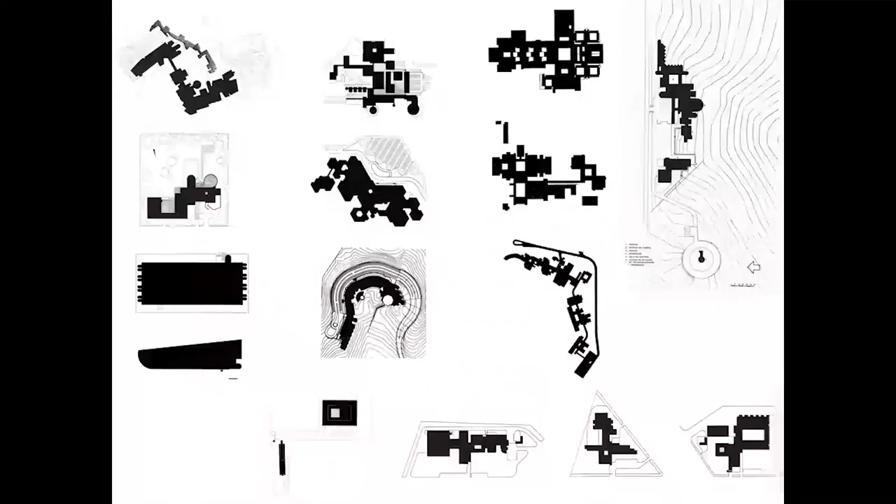Julio Cano Lasso is an architect that was born in 1920 and belongs to the second generation of Spanish modernity. It's a generation that was modern, based on the international style, but also recovered a lot of the traditional knowledge of Spanish architecture. He's an architect with a huge body of work, and is very eclectic. He's able to work with different forms and different programs in a very special way. He has a very special methodology of work based on the exploitation or utilization of tradition, of different traditions, depending on where he's operating with the architecture.

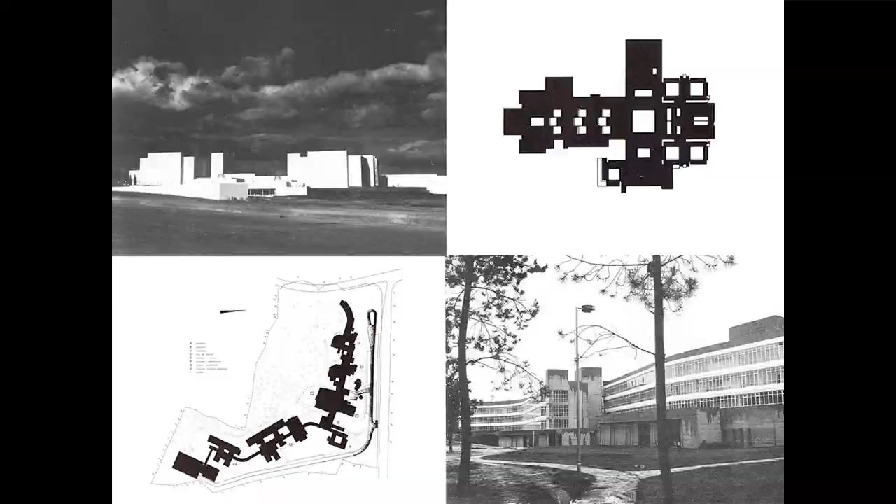For example, these are two good examples of how he used to operate with architecture. These two buildings are the same building: a labor university, a university for plumbers, woodworkers. It's not a higher education university, it's for artisans. They have exactly the same program, exactly the same area, but they are situated in two different areas of Spain, one in the north and one in the south. You can see the difference he's able to make, how he's able to integrate the traditions of architecture depending on the site he's operating.

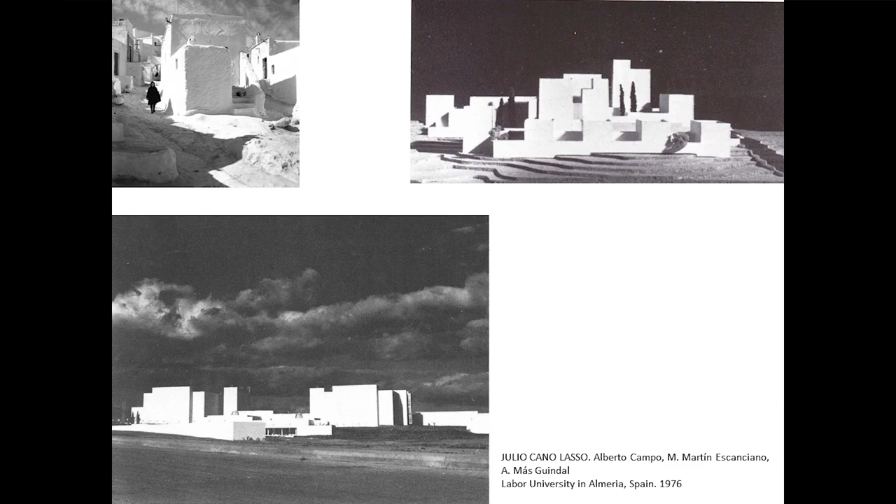For example, this is the Labor University of Almeria in the south of Spain, and he's using this kind of whitewashed volumes under the sun, with a lot of shades, protecting from the sun.

And this is the same university, but in the north of Spain, the Celtic part of Spain. So he's using another set of tools, another set of architectural elements. The response, the answer to the same question, is completely different depending on where he's working. And this is how he uses tradition, in a very free but very thoughtful kind of way.

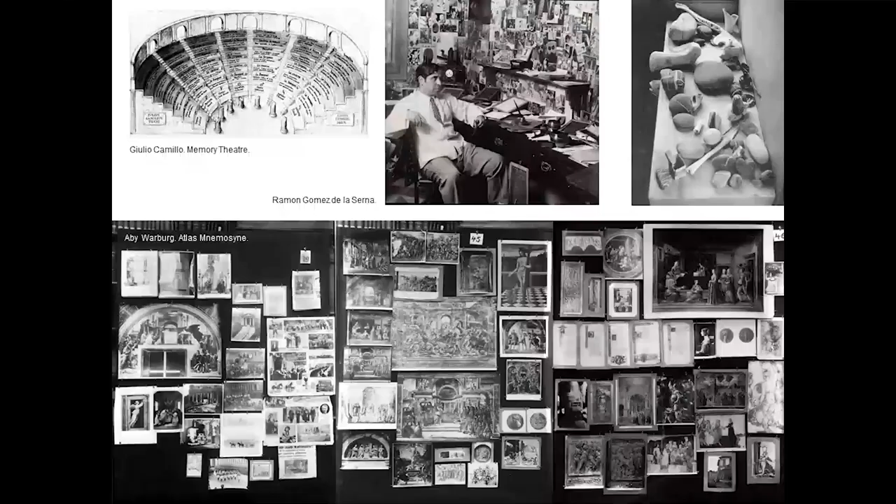And he's not the only one using this kind of tradition, constructing this kind of constellation of forms for each project. There are other examples, like Ramón Gómez de la Serna, the Spanish writer, or Giulio Camillo, or Aby Warburg in the field of history of art. Julio Cano Lasso was always making this kind of constellation, or archipelago of references, for projects that were mostly between the modern moment in Europe, classical European architecture, and some more personal references to his own work as an artist and as an architect.

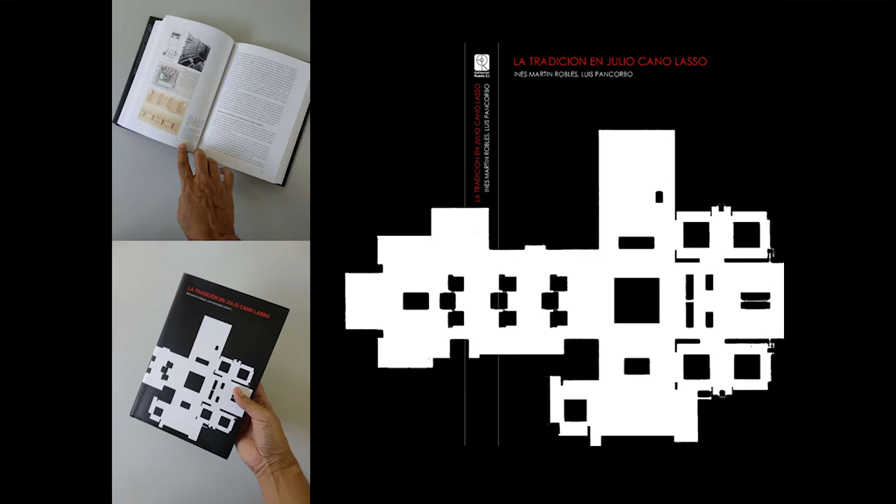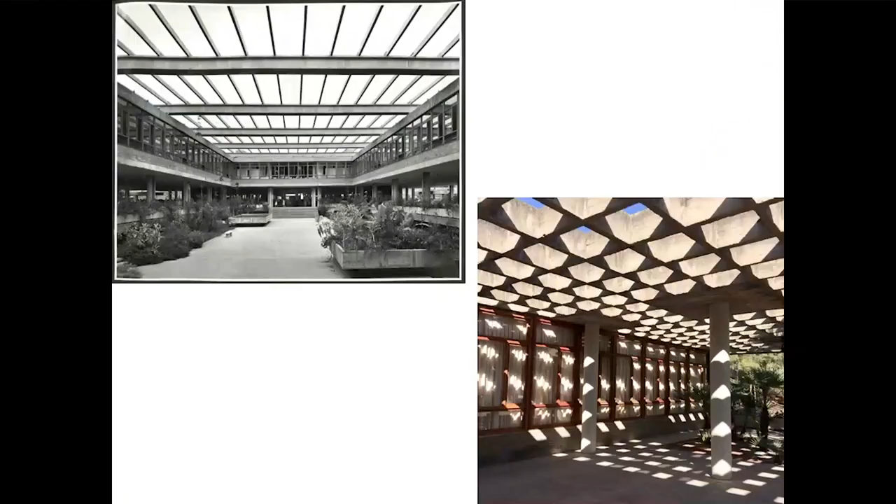So we have been studying this for many years. We published this book about his work and his methodology. And it's important to situate him also into the Spanish tradition, he belongs to this second generation. He was working with Fernando Moreno Barbera, one of the first modern architects in Spain, who was also specialized in universities, with a lot of care for the material.

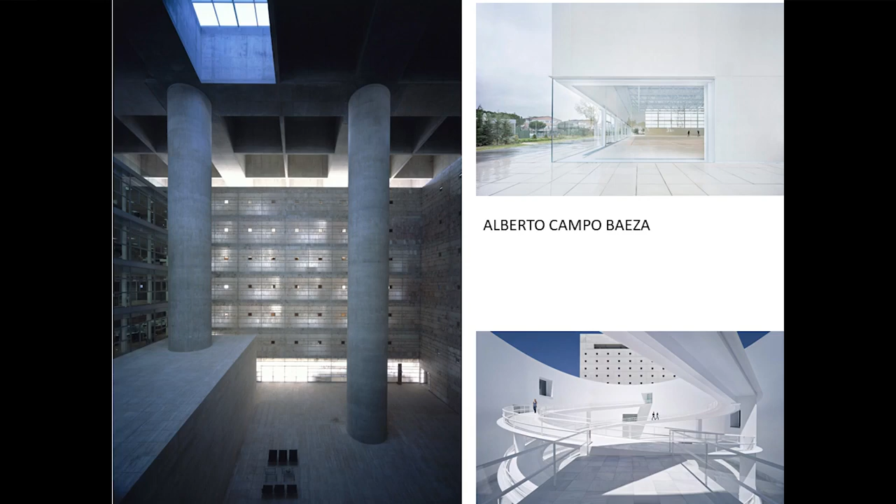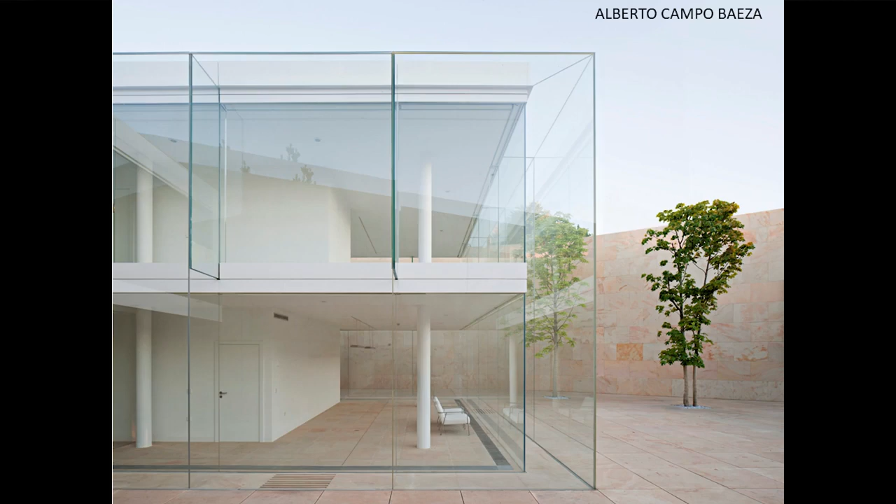This is a characteristic that is also present in Julio Cano Lasso: a lot of care about the material depending on the site, and a lot of care about the methodology and the insertion of tradition into the work. So what are the architects that have used this methodology? Who are the heirs of Julio Cano in the history of architecture in Spain? For example, Alberto Campo Baeza, an architect still working today, shows the same care in materiality and the same insertion of tradition into modern architecture.

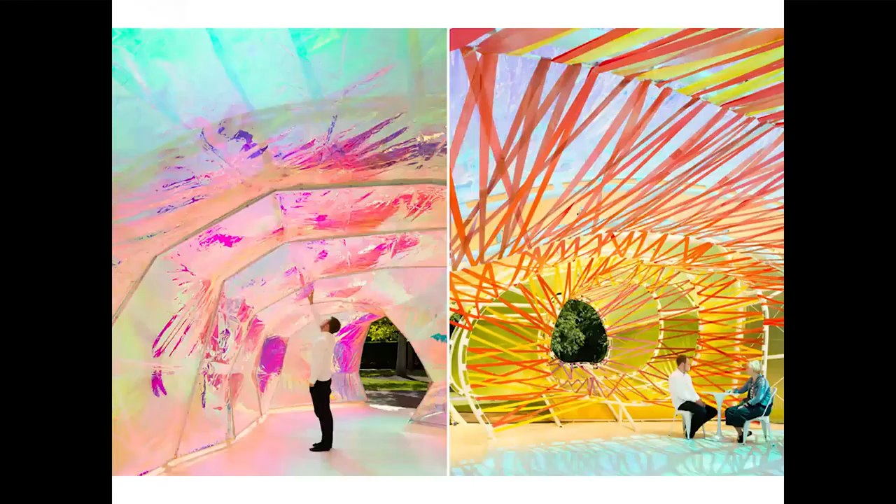For example, Ignacio Mendaro, this is a work in Mexico. Selgas Cano is a very prominent practice today with a completely different style, but they are closely related to Julio Cano because Lucia Cano is his daughter and Jose Selgas is his son-in-law, so they are family. You can see the same materiality and the same experimentation with the technical condition of architecture and materials.

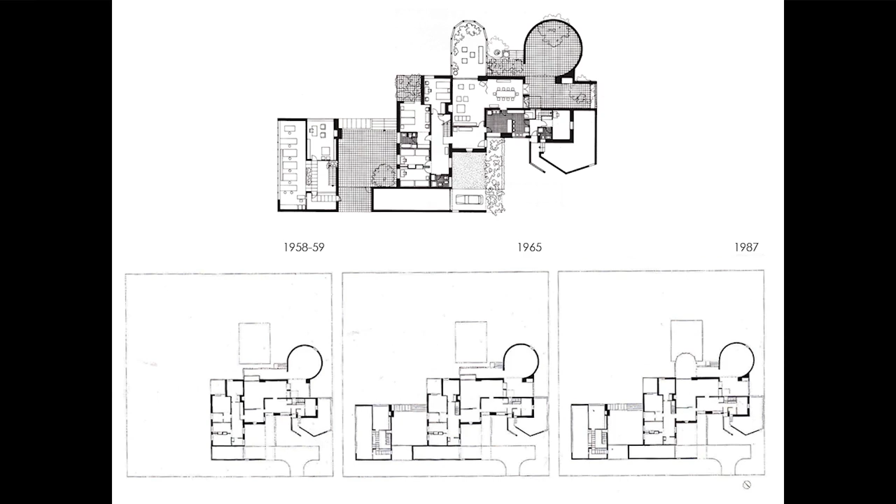So these are pictures. And of course, Studio Cano Lasso, where Ines and I were working for 9 years. This is actually the office of Julio Cano Lasso, and we were working exactly in this part, I think I can draw it. We sat exactly there for 9 years, making lines. It's a very traditional kind of architecture, but also a very modern kind of architecture.

While working there, we had growing responsibilities over the 9 years, and we ended up being the directors of many of the works of the office. For example, this is a very good example of the work we did there.

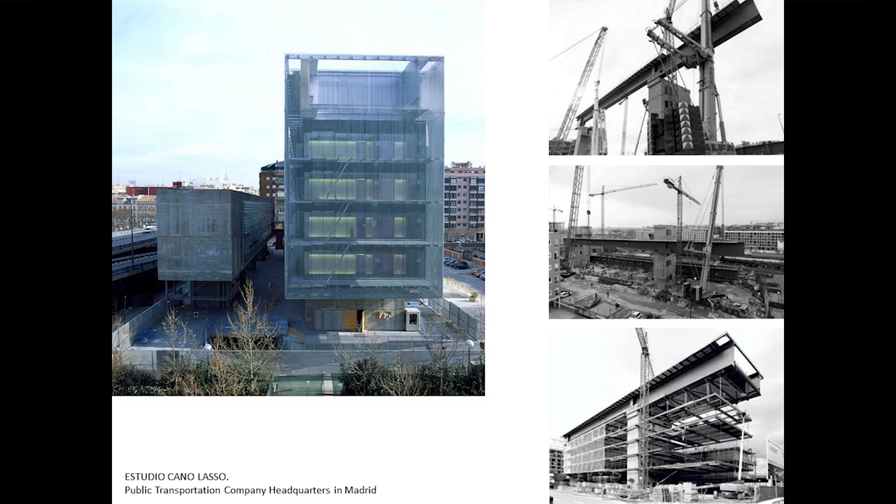This is an office in Madrid for the public transportation company of Madrid. You can see it's a very technological object with a lot of care in the material and in the performativity of the facade materials. The building is actually hanging from these beams, like a big beam with a lot of hangers, and the building hangs from there. So there's a lot of effort in the technological development of the building, but it's also very rooted in the European tradition of the modern movement.

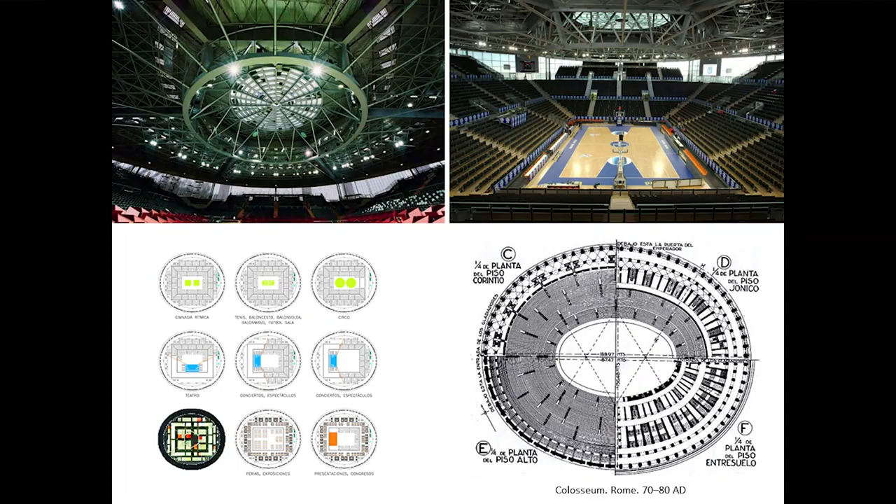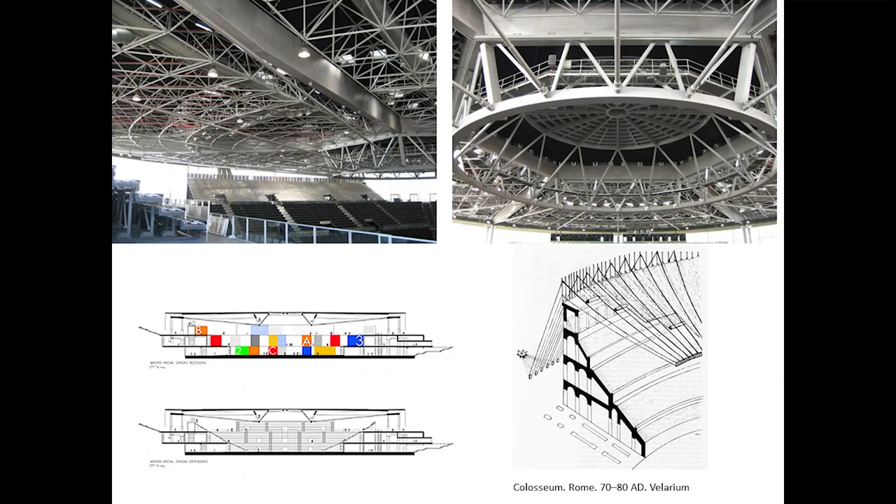This is another work we did for Studio Cano Lasso, this multi-purpose pavilion. Again, it's a highly technological building, but also highly traditional. If you see the plan of this building, I remember tracing it on top of the plan of the Coliseum. The form is exactly the same, because the visibility of the Coliseum is perfect, and we wanted this for this building. Even the structure, a tension structure hanging from the sides with a compression ring and a tension ring, is based on the velarium of the Coliseum. So it's a very traditional interpretation, a reenactment of a traditional architecture that we found.

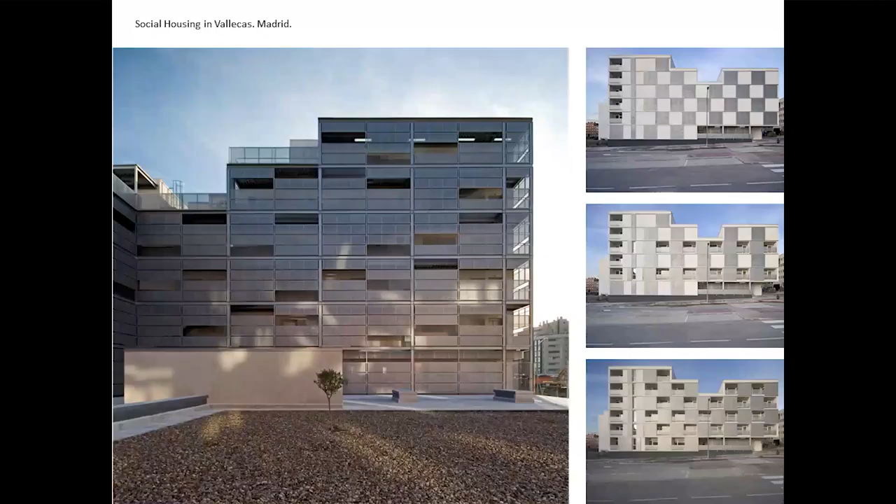And of course, at one moment we started our own practice, and we started doing what we knew, the same kind of things: a very technological and industrial kind of architecture. This is a social housing project in Madrid as well, but also using traditional devices to root our architecture, to relate it to the traditions of Madrid architecture or Spanish architecture in general. For example, you can see these houses.

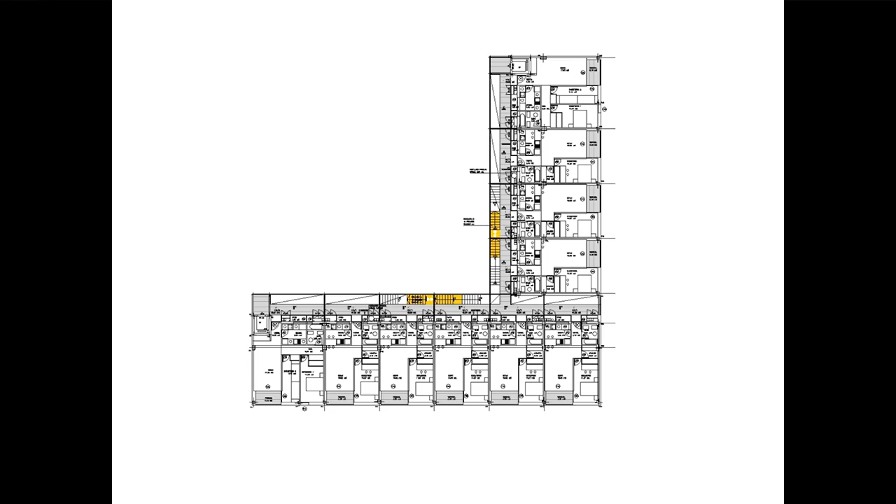These houses have only one window, that is not actually a window, but a vertical patio, where the shutters can slide into the building. This is very related to the tradition of Mediterranean patios in vernacular Spanish architecture, but changed from a horizontal position to a vertical position. We explored this in many of the competitions of our office.

This is another project that's a good example of this twofold condition between tradition and technological development of the building: these temporary shelters in Parla, very close to Madrid as well.

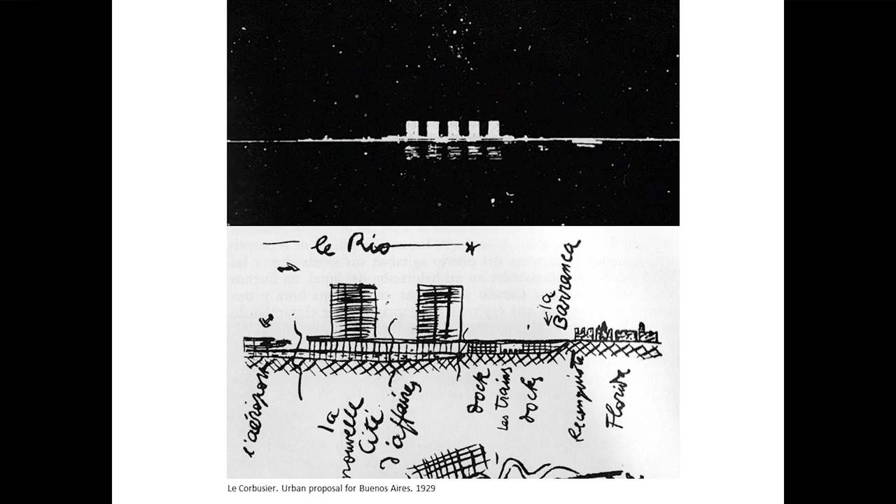That is a building that is inspired by, or was always in the back of our mind - this drawing by Le Corbusier for Buenos Aires, which you can see is very similar to the final thing we did in Parla.

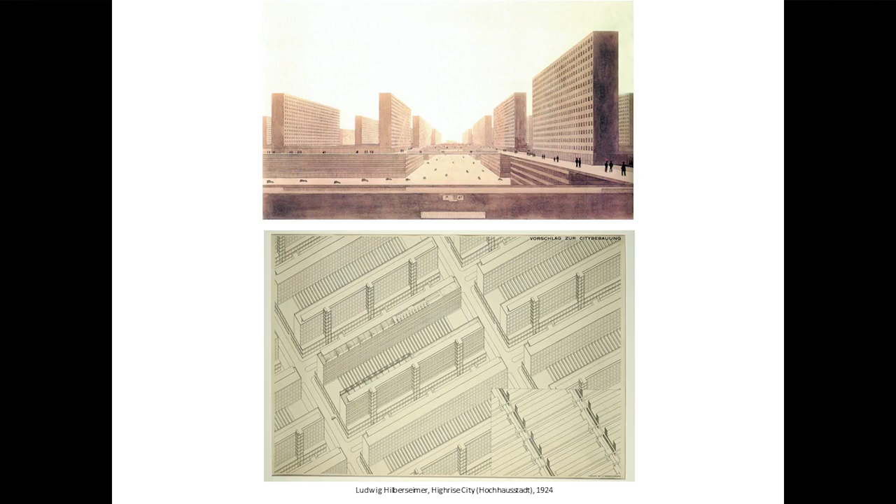We started exploring other references like Ludwig Hilberseimer, embedded in this kind of architecture. We explored using vegetation or green spaces to enclose the public spaces of the building. This building has housing or temporary shelters on top, but public uses in the bottom, in the plinth. We created some gardens to enclose this space - this was the first time we started using this kind of vegetal architecture.

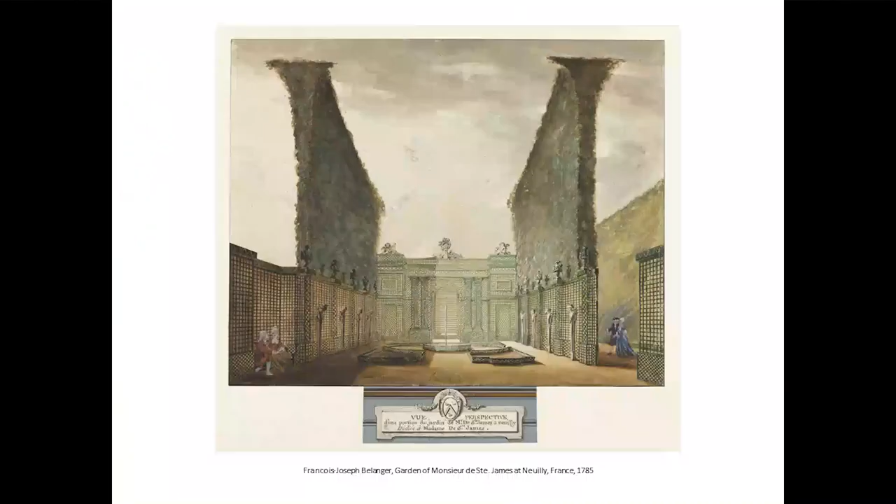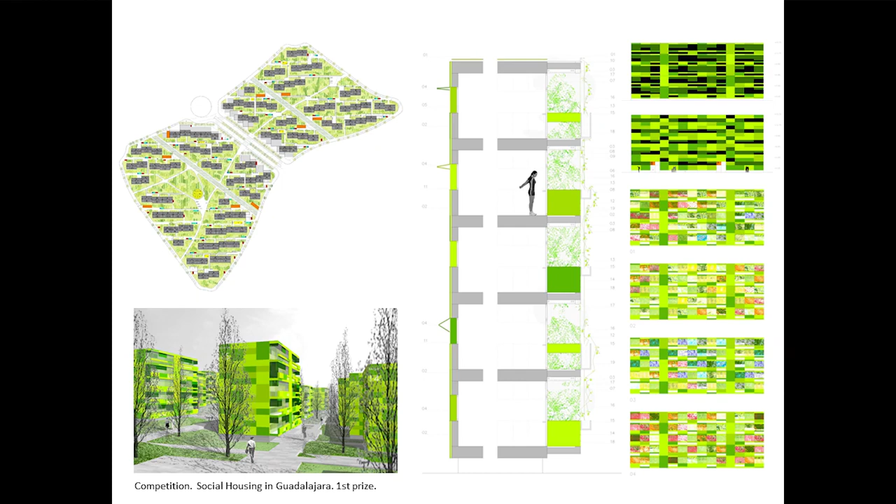You see in the diagrams on the right that there are a lot of spaces enclosed, defined by this kind of vegetal building. More literally in these buildings in Guadalajara - this won first prize - there were vertical gardens facing south all the time to protect the houses from the sun, and also to create continuity between the horizontal and vertical planes of the public space.

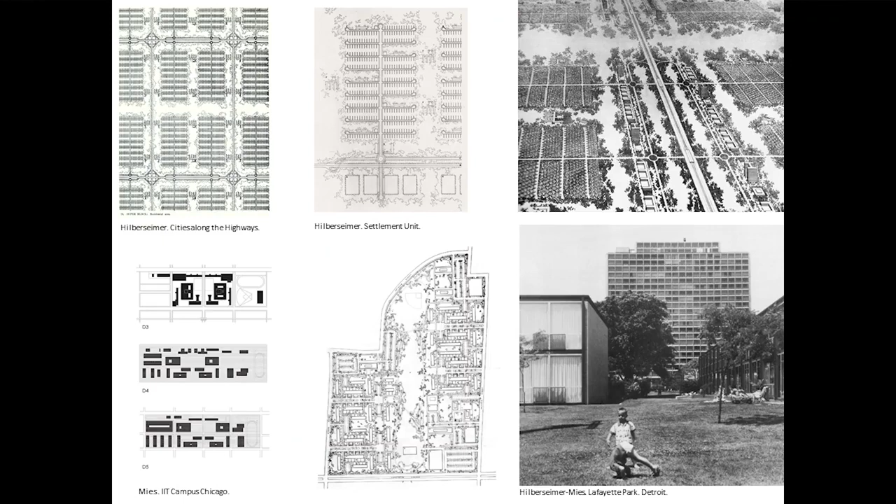Of course, there are a lot of references again to Hilberseimer, to Mies van der Rohe, to the IIT campus in Chicago - that is the only settlement unit by Hilberseimer that was able to be built, even partially.

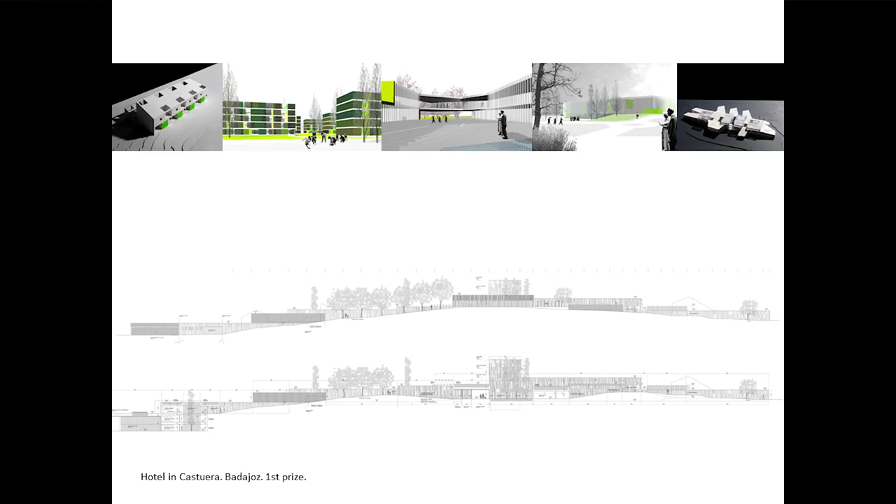Our office is based on, our clients - we never had a private client until now, until COVID, we'll talk about that later - but we do competitions, architectural competitions. We have done more than 100 competitions, and we won several of them. So this is the specialization of the things we do in the studio.

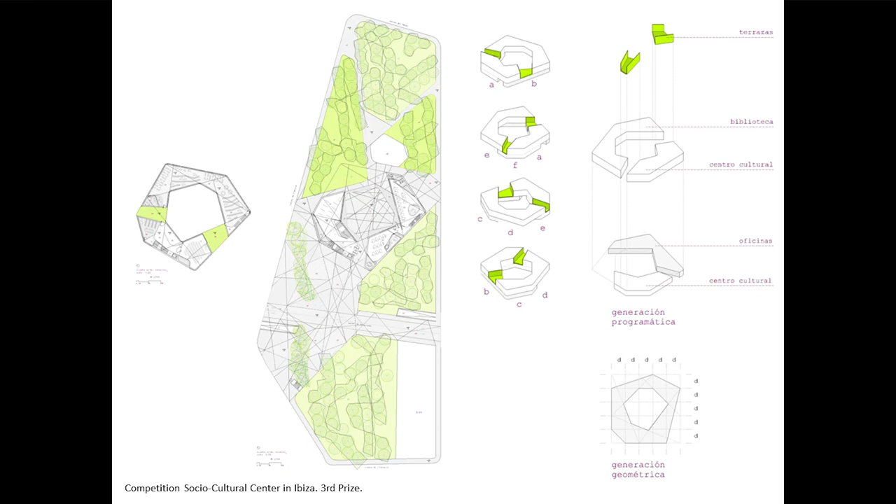For this building - this project, the Villanueva de la Serena Congress Center - it belongs to a family of projects where we were trying to wrap around a public space with a continuous building. Other members of this family are two projects: the competition for the Socio-Cultural Center in Ibiza, and this other cultural center in Valladolid.

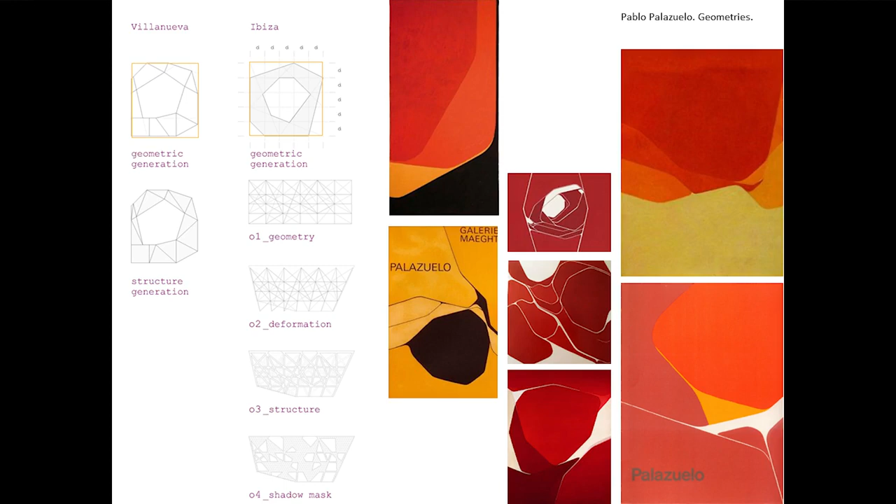In this family of projects, we were trying to achieve complexity in the spaces through the use of a basic geometry coming from divisions of the square. As a reference for these geometries, we used the body of work of the Spanish painter, also trained as an architect, Pablo Palazuelo.

In the model, usually when you're thinking of a fluid space, this is the kind of work related to fluid spaces where parametric software is needed, and this raises the budget of construction a lot. For example, in the Disney Concert Hall in Los Angeles, the budget was $130 million for double the area we have in our Congress Center, but our budget was only $10 million - a huge gap.

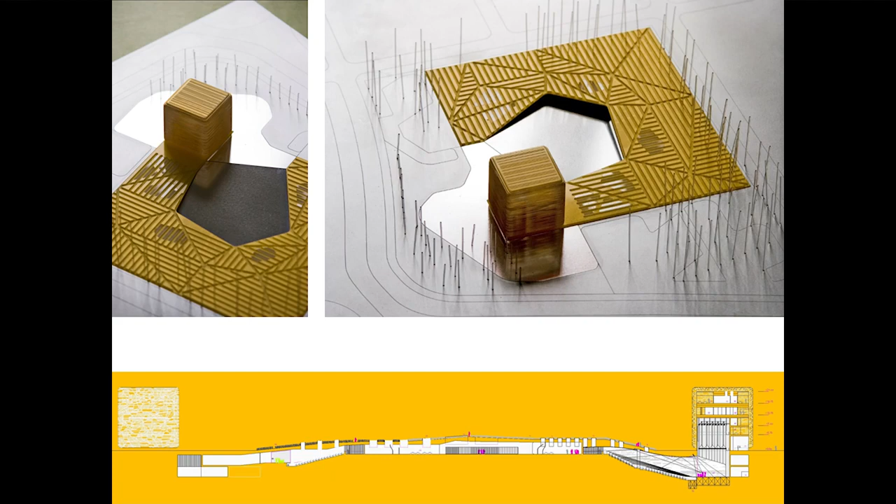The site of the building is situated on the boundary of the town, between the town center and the crop fields surrounding the city. So we wanted our building to be a transition between these two worlds, and therefore we wanted our project to be like a landscape, not a building. To achieve that, we made the roof the main facade of our building, as a new landscape, but we also created this part that is a public square accessible for everybody.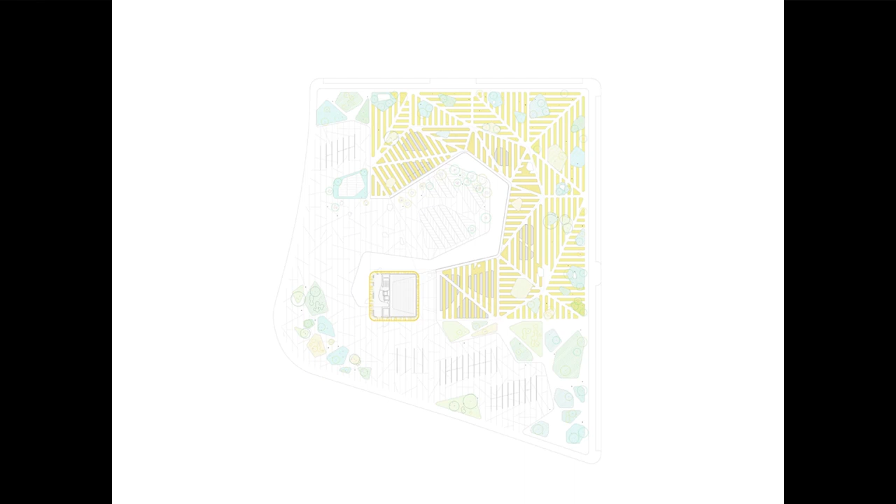And also a public part on the other side that is created with the crop fields. As you can see in this aerial view, it is some kind of intermediate space where these two worlds meet.

We wanted to have a public park that was not the typical park, but that was related with the agricultural landscape. So we use local weeds and local crops for the plants in the roof.

The surrounding fields, in some moments of the year, look like some kind of fabric. So we take advantage of this situation for the design of our roof.

As we wanted to have a landscape and not a building, we use landscape references. So for example, we use in this case the reference of the ha-ha.

That is this kind of fence, this English landscape device that they use to keep the cattle out of the houses without being visible, without seeing a wall. So it is some kind of invisible fence that you can see here and here.

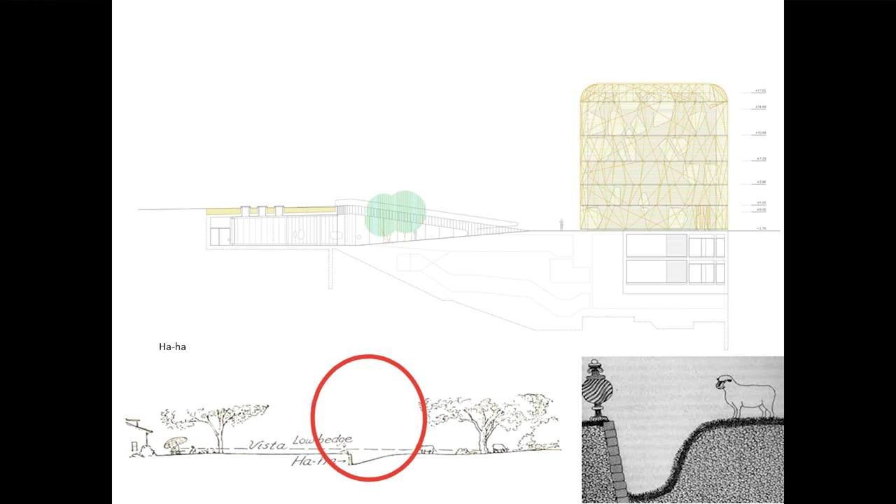And that you actually can see in the development of our project in the same way, so you can slide down into the building or slide up on the top of the park.

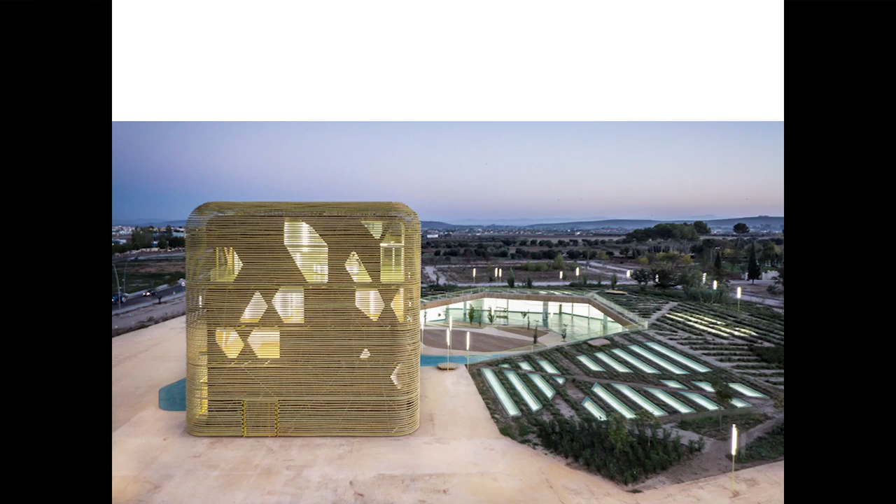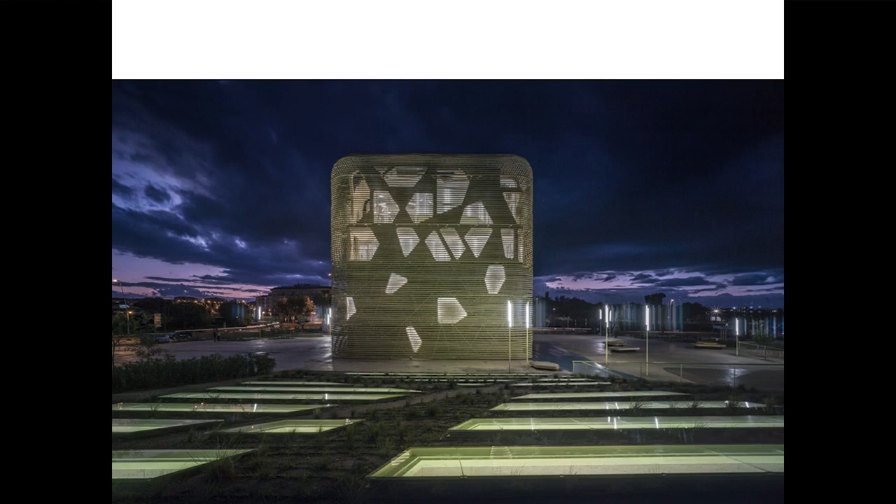And this is the space that it creates. So you can see the crop fields surrounding the building on one side, and in the other picture, you can see the background of the more urban part of the project.

So we wanted to make a landscape, as I said, but we found two big problems. One was the program. It's a building that should be divided into two big parts.

So there is part of the program, all those parts that are written in black, and this other part of the program, the one in green, that needs a different schedule and also a different entrance.

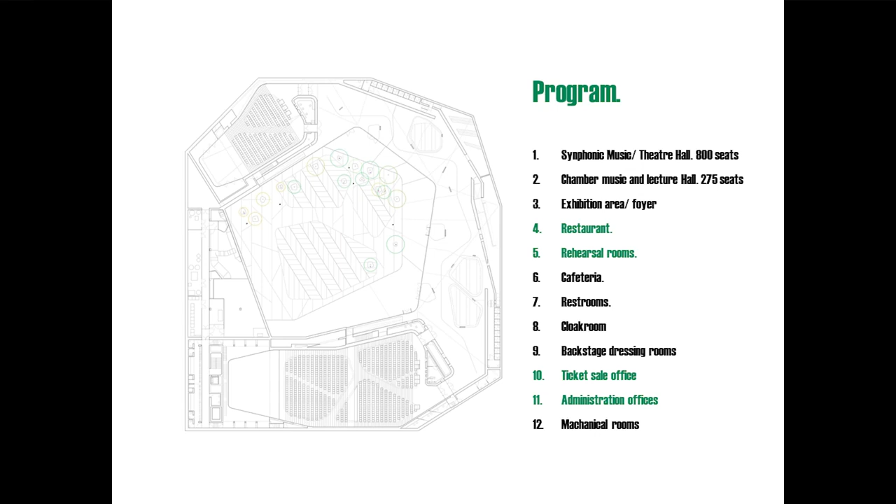And this is for a very functional reason. It's just that you need a box stage, a case stage, that in our case was a 6-floor stage building that we need to put inside our own building.

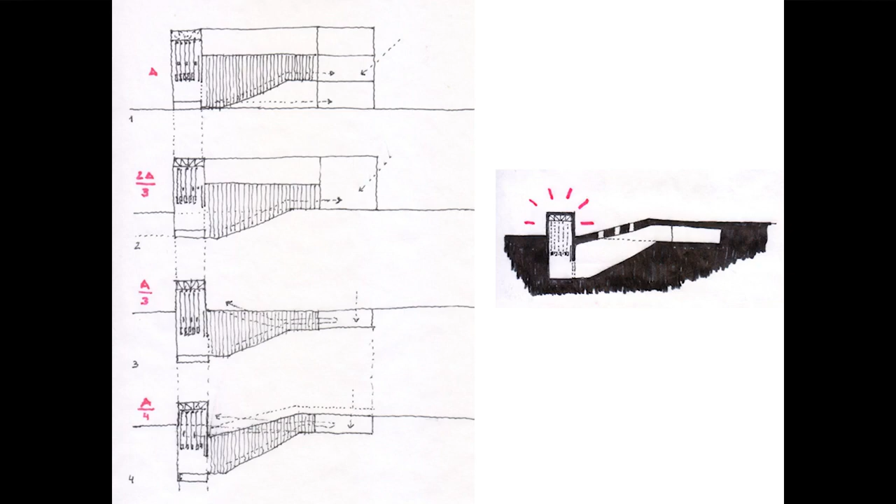So in this set of diagrams, you can see how we try to push our building into the ground in different iterations, until we reached the point where it was impossible for us to completely hide the stage box.

So we decided to take advantage of this situation, and this duality of the program gives us the opportunity to place all these things in the secondary kind of program on top of the stage.

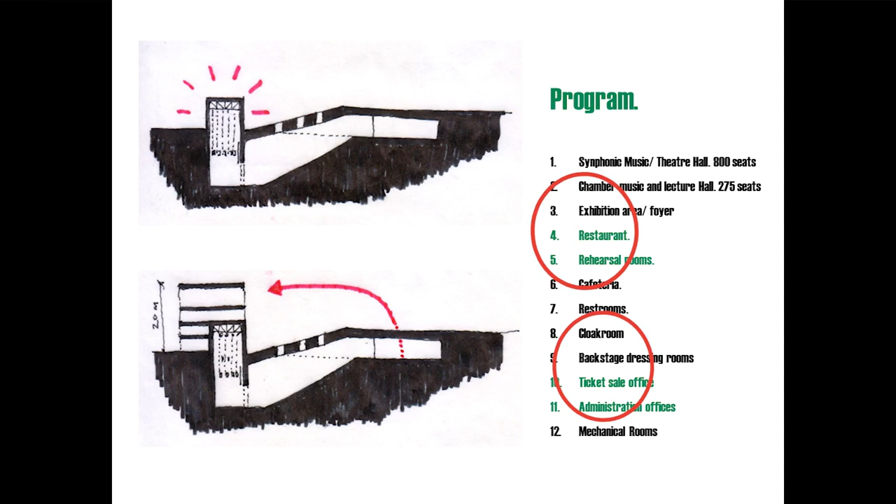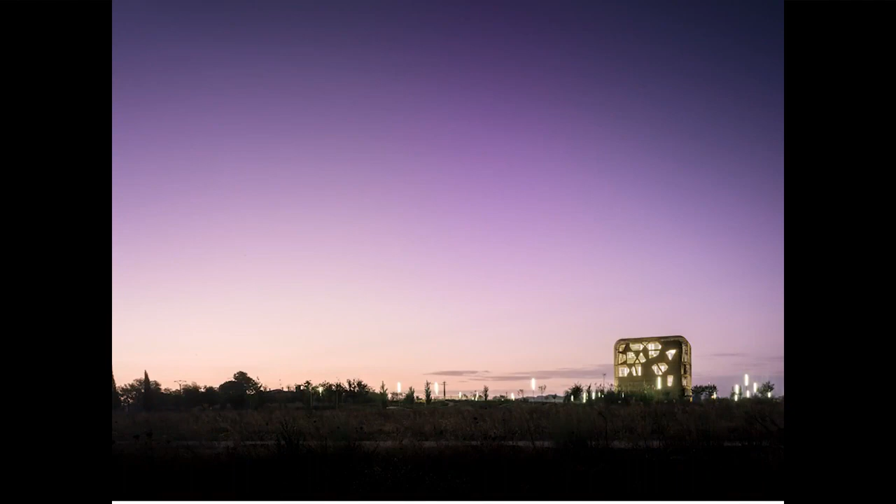So providing then a different entry and a schedule, and creating this box with the intention of also being a landmark into the landscape, so that it marks a very continuous landscape and marks the institution that is hosted inside.

We tried to create something similar to what the church steeples, the stork nest, or the bales of hay are doing in the landscape around our building.

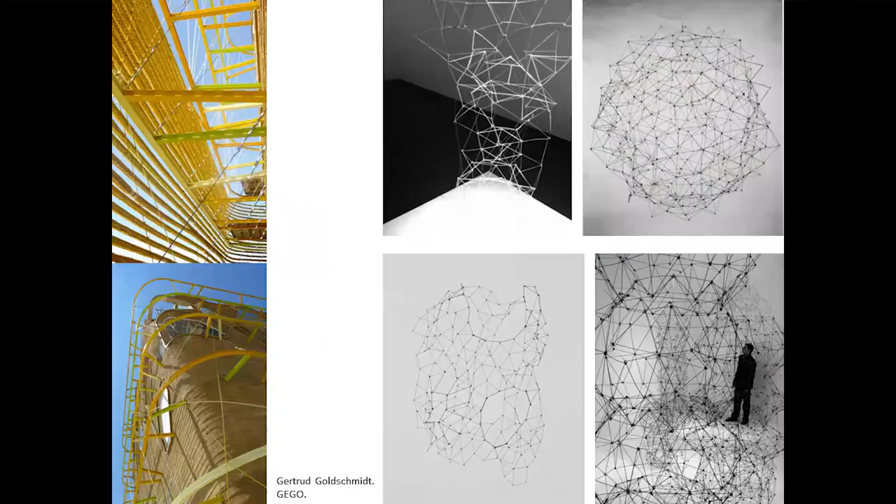We use for the structure of this box this more artistic reference, the work of the German-Venezuelan sculptor Gego, that has this kind of hanging structures.

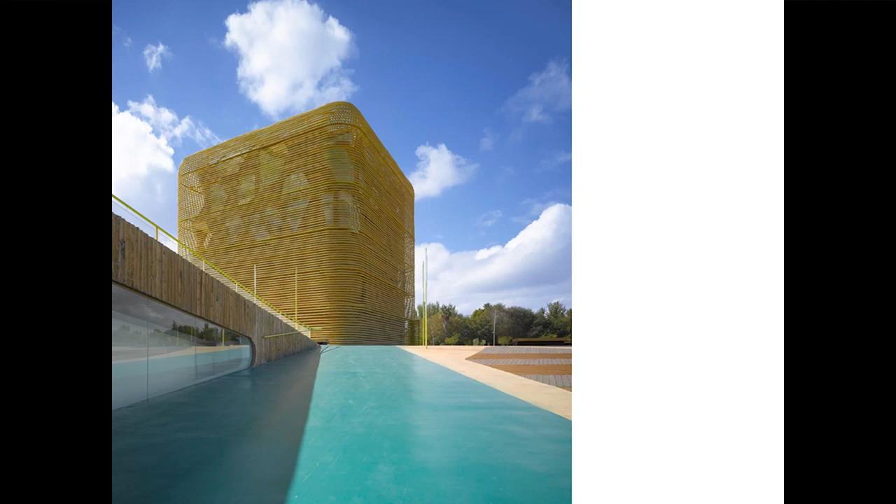So we actually made this skin out of ropes, hanging everything with this tangle of tension members, cables, and wires, putting this kind of rope skin outside the building as a shade device.

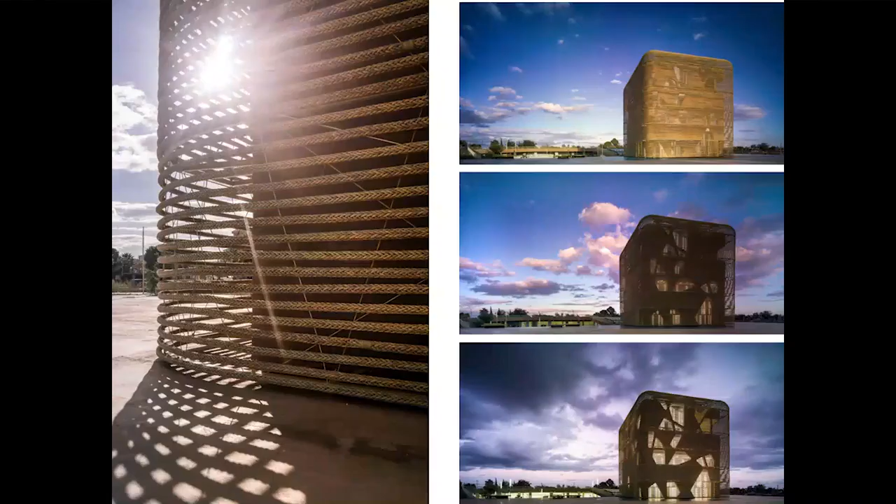It is a very performative skin because you can have a very different transparency of the skin depending on the light conditions happening inside or outside the building.

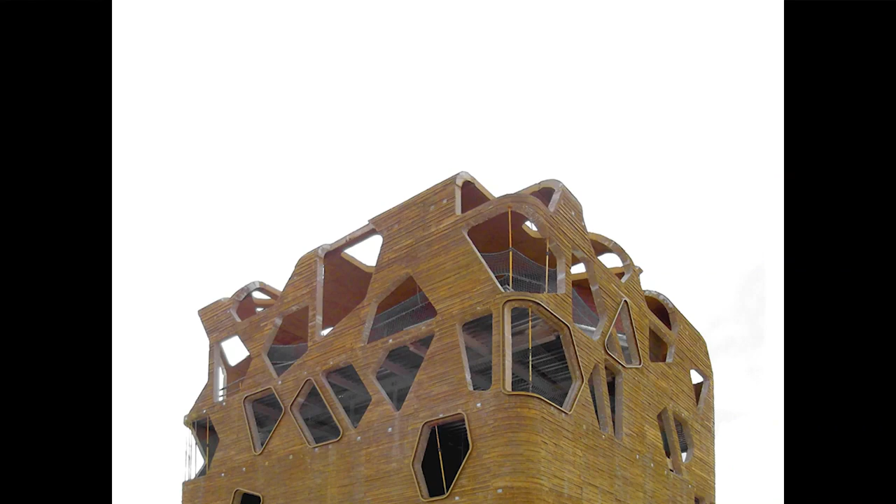As we needed to have a structure inside under this skin, we decided to have something more continuous, like a shell, made out of concrete, that is like a shell with perforations that have also the same geometry as the rest of the building around.

This part of the building is more related to the burrows of animals, the hives of wasps, or other kinds of animal architecture related with rough conditions.

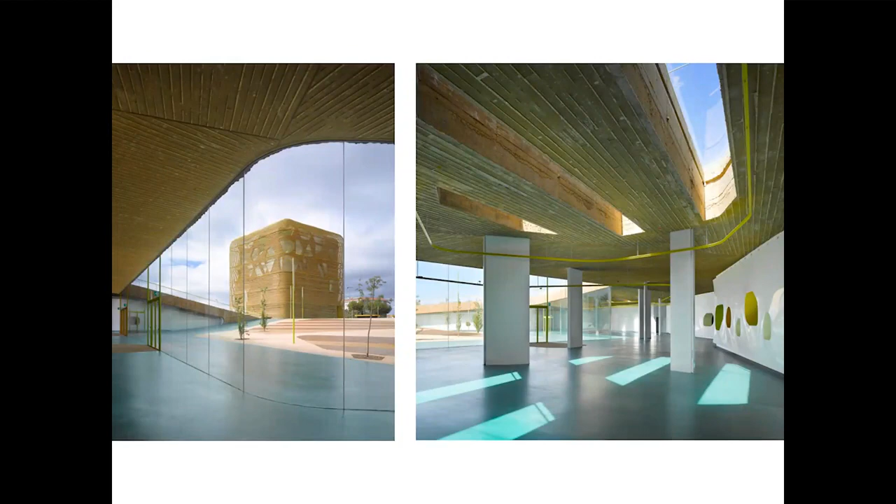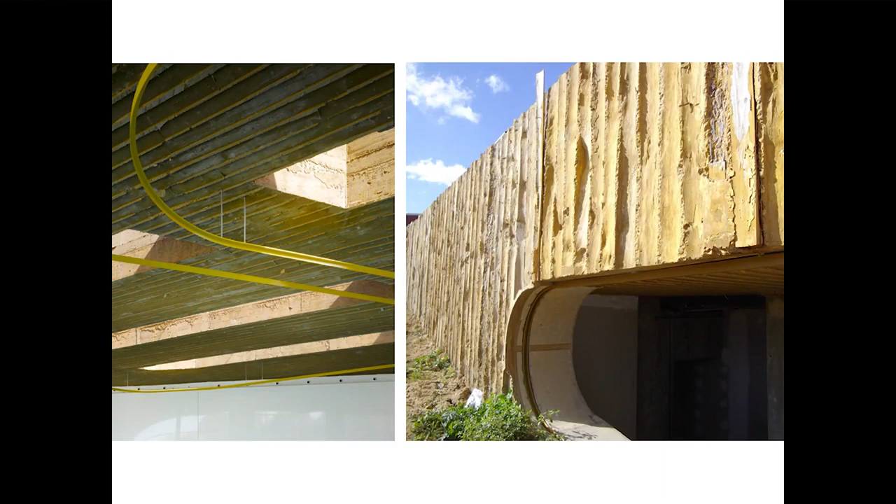We wanted to have this kind of contrast between the delicate interior and the rough exterior. And we used formwork that was very rough; in fact, it was directly firewood cast into the concrete.

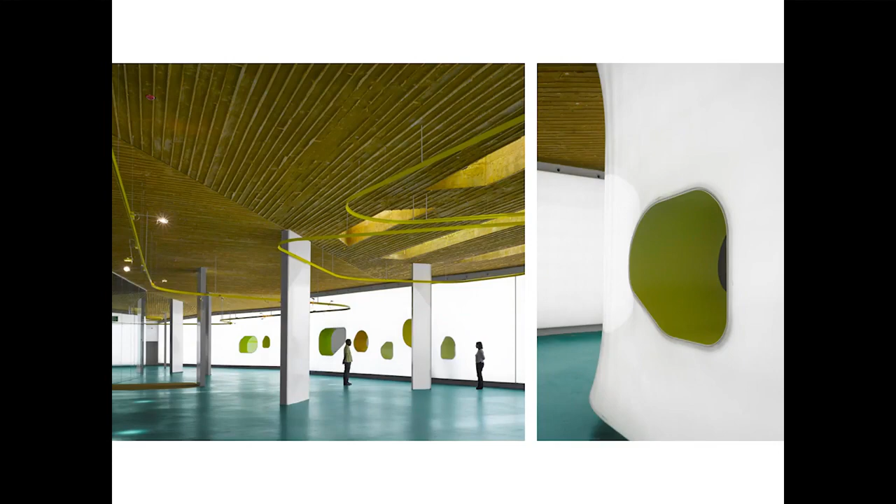And we contrasted it with some kind of more delicate surfaces, making references to the condition of the subsoil of the area, which is always full of water.

So as this area has a lot of water, we wanted to have a continuous and seamless kind of skin in those spaces, creating a reflection of this watering condition ambient inside.

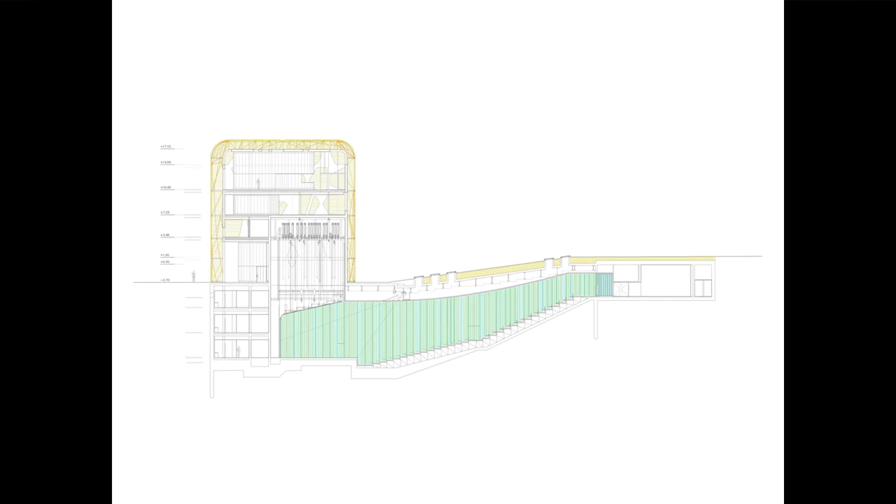So those are the sections of the two main spaces. This is the chamber music hall and the symphonic and theater hall. Both relied on materiality and on light in order to activate those spaces and to create different sensations depending on the interior and exterior conditions of light.

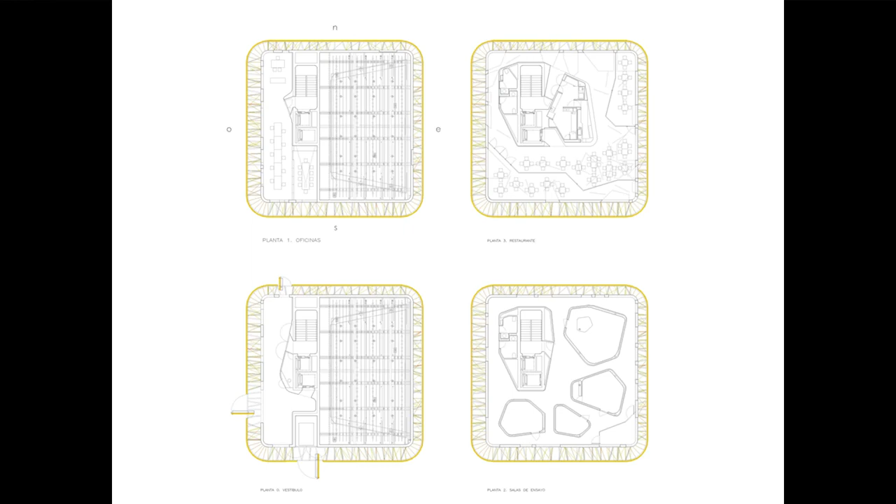Those are the plans of the box. This box is the landmark of the building, and it's also a very simple geometry sealed with this skin wrapping around. But this simple geometry is perceived as a very intricate and complex interior space.

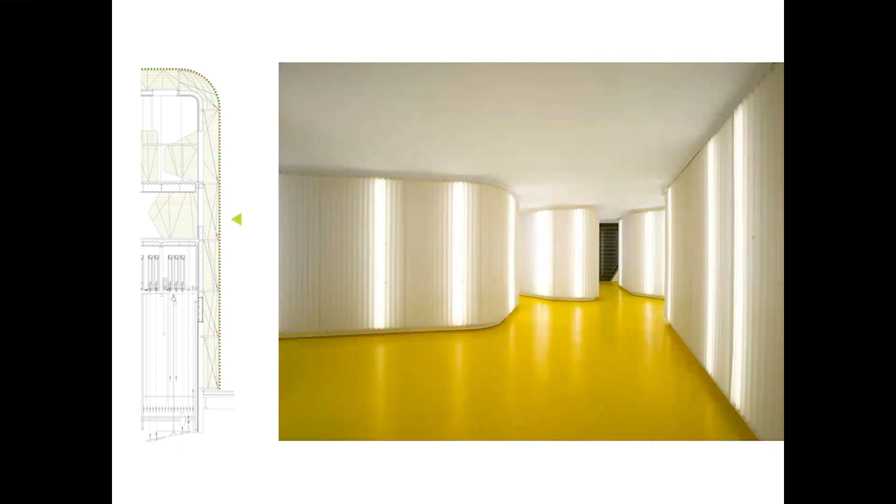As this is the upper level, that is the restaurant on the top, or this other photo that are the rehearsal rooms in the intermediate level. And at the end, what we achieve is a building that is both a landmark and also very integrated, through the color, into the landscape and the surroundings.

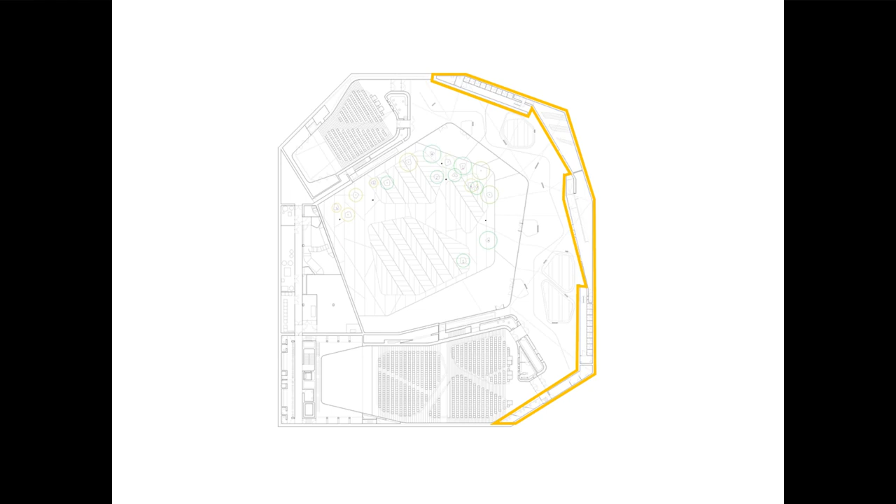Just by sinking the building into the ground, what we achieve is, first of all, sharing all the storage rooms of the building, so we have the possibility of having only one of each. We also share the mechanical systems in between these two stage boxes.

The mechanical systems in this building were half of the budget, so it was very important to reduce this part. Also, by sinking the building, what we achieve is a better thermal behavior, with less solar gain, so the machines were much smaller, and we had the possibility of cooling them with underground water. So the budget was divided by two.

Through these operations, another important thing to understand about this scheme is that by doing this kind of sunk building, instead of having all this facade — which is the more expensive part of the project — we only needed this facade. So we could save a lot of money there, and spend more on the parts of the facade that we actually wanted to be more prominent in the building.

Now we are going to talk about the current work of our office. This is a work where the auditorium was finished four years ago.

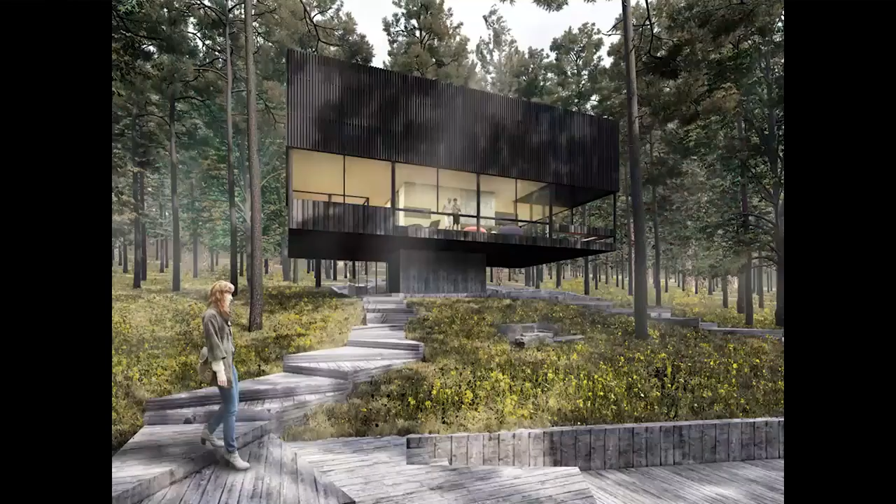We try to recover the single-family house, which used to be more like a formal experimentation, a whimsical kind of project, and transform it into some kind of exploration of new ways of life — how people want to live after COVID, and how this situation can change architecture.

So for example, the first example is this house in the north of Spain, in Asturias, for a family that wanted to leave downtown Oviedo and live in the countryside, but without engaging the countryside — without bugs, just a very visual kind of contact with it.

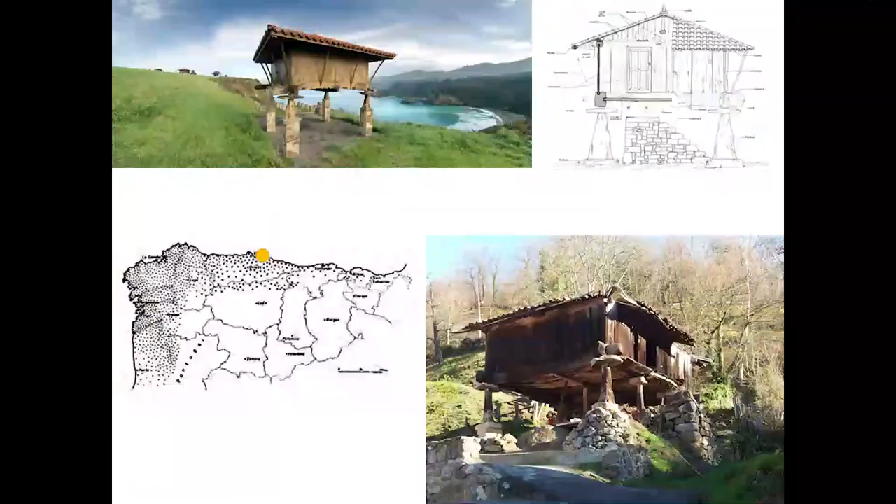They asked for a house that could work completely online, with their own spaces that could be transformed from a bedroom to an office very easily. So we came up with the idea of using this kind of vernacular granary from the north of Spain, called an hórreo.

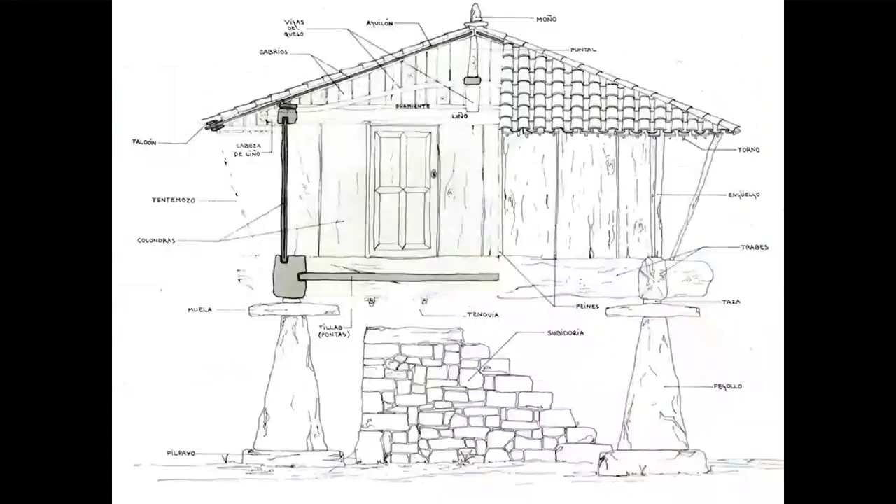That is, as you can see, like some kind of stone structure with some kind of timber structure on top that is very slender, almost like a tension kind of thing. It's like several parts, but the important thing is, of course, we have more modern kind of references as well.

What we end up doing is taking advantage of the new technological advances of timber in Spain. So now we are starting in Spain, like in the center and north of Europe, to work with CLT.

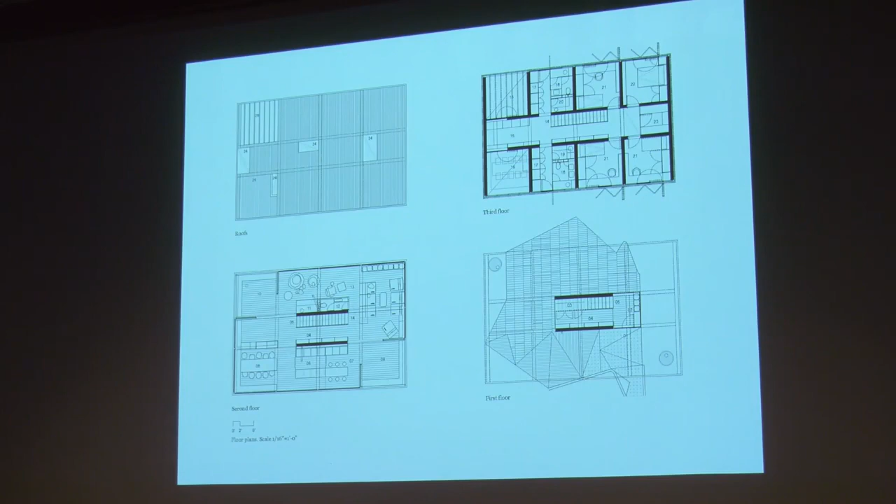These CLT beams create a cantilever, and from this cantilever we hang this level here. That is a level without a structure or anything.

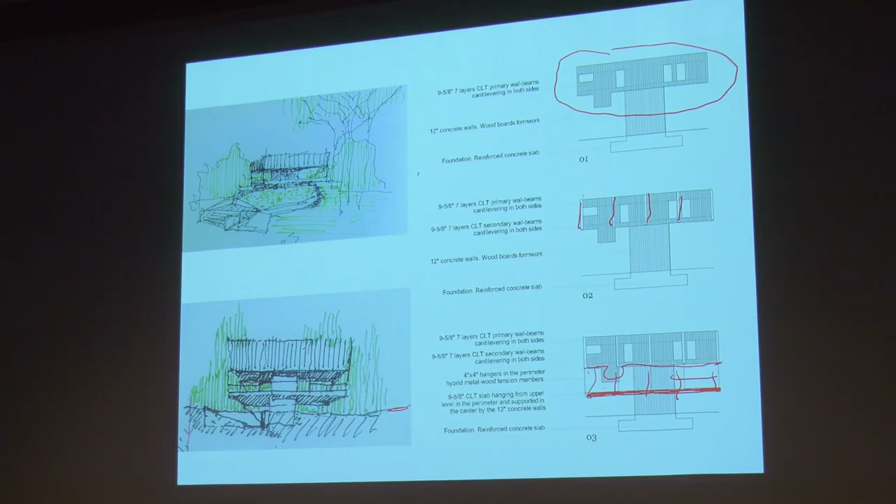So it's the place where you can take advantage of the landscape surrounding the building. The upper level is very private, very enclosed. In the upper part there are the bedrooms that can be transformed into small offices for online work, and the lower part is an open field.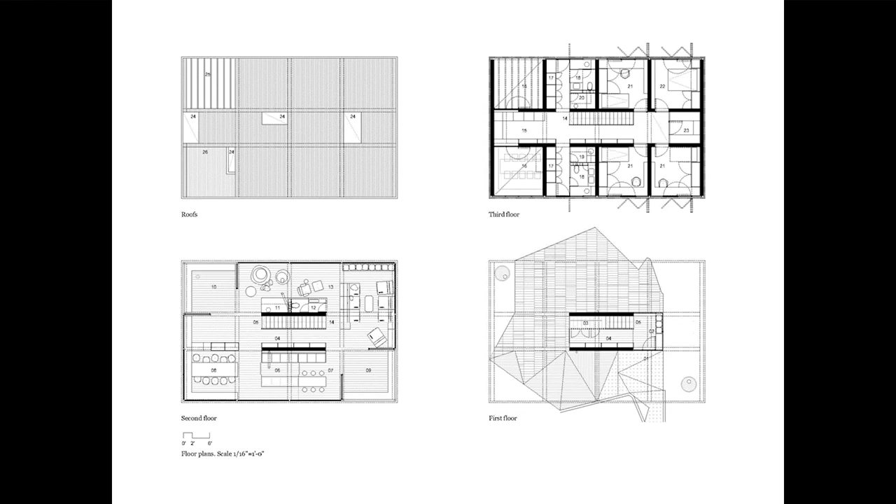That is visually connected to the landscape. So you can see here the sections of this house, the difference between the closed upper level and the very open lower level. So we created some kind of suspended life for them, into the landscape, the very green landscape of the north of Spain.

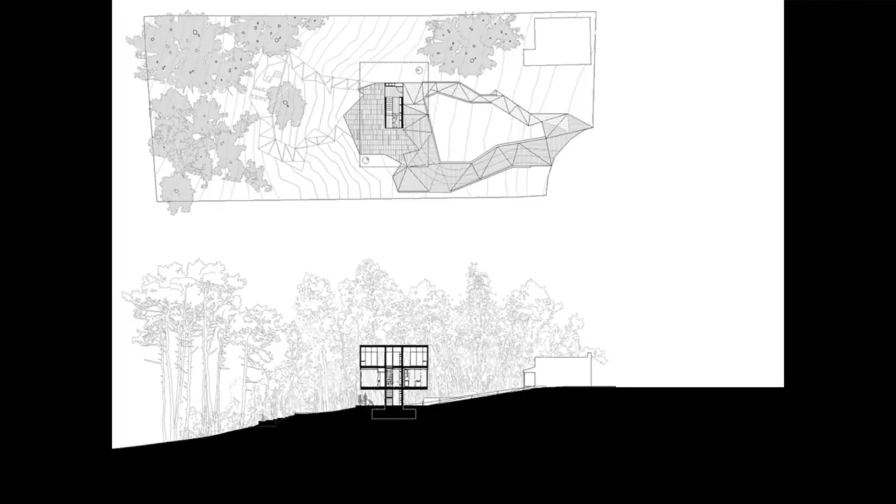And we created this kind of transition between the interior and the exterior all the time, so that you cannot tell where you are, if you are inside the building or outside sometimes, but also elevated from the terrain.

The second example of this kind of project is this house in the mountains, very close to Madrid, in El Escorial. The situation was completely different because they bought this plot of land that was very expensive, full of big trees, and they spent most of their budget buying the land.

So they asked for something that is extremely inexpensive, the budget was minimal. But the good thing is that they actually wanted to have a life that was mostly outside. They were all the time hiking, and this is very close to a lot of hiking trails and things like that, so their aim was to live outside the house.

So we thought immediately about what is the cheapest way of building in Spain. And the cheapest way is this kind of prefab, pre-tension pieces of concrete that are not only inexpensive but highly available. They are very easy to transport, they are not very handsome, it's kind of no architecture, but it has become very common in Spain, for any agricultural building or something like that.

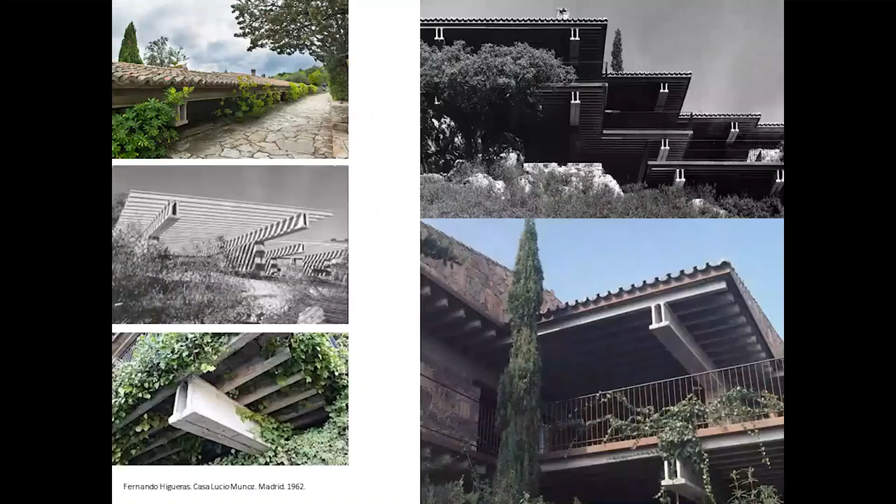But we had a good reference for this in the history of architecture of Spain, the work of Fernando Higueras, who was using these kinds of pieces in the 60s and 70s, but in a big, oversized format, for making these cantilevers.

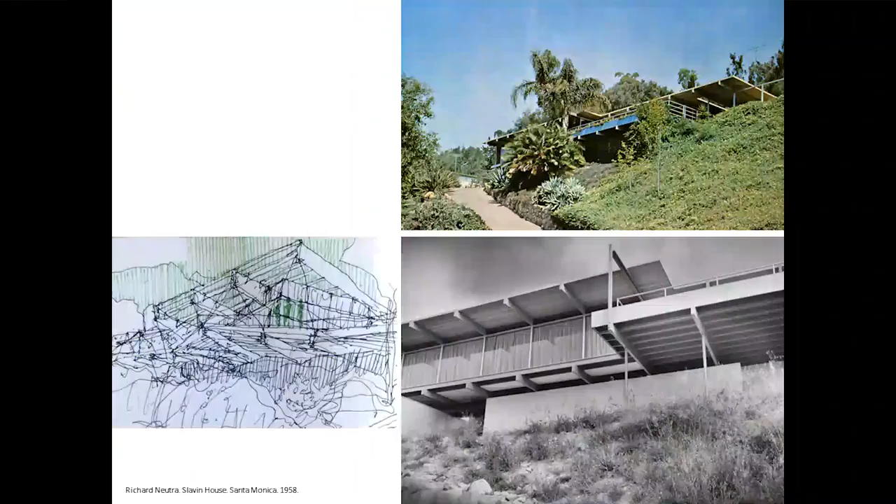In this house, for example, this is the house of Lucio Muñoz, a very famous painter in Spain, and this house is very close to the site, like 10 minutes driving from where we were doing ours. Of course, we also have references that are more personal, probably from our experience in the US, for example Richard Neutra, in these houses that are perched in the hills very close to Los Angeles or in Beverly Hills.

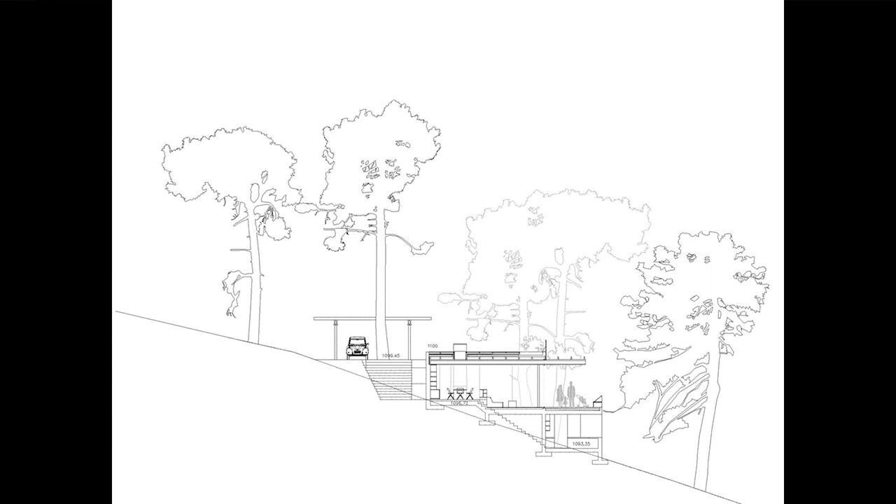We came up with this system where there is a very steep slope that is rock completely, so you cannot excavate there, it's very expensive to excavate. So we were stepping down the building, and if you see the footings, there is almost no excavation, very small excavation to minimize the budget.

And also we wanted to have this kind of duality, where from the back the building is almost invisible, it's this continuous landscape with some kind of terrace at the end.

So you see the landscape of the mountains at the end of the house. It's only a canopy for the car, and then a stair going down.

The other side is like a perching house, facing the landscape. It's mostly a canopy, like these kind of beams, just stacked one on top of the other, with some kind of very light enclosure.

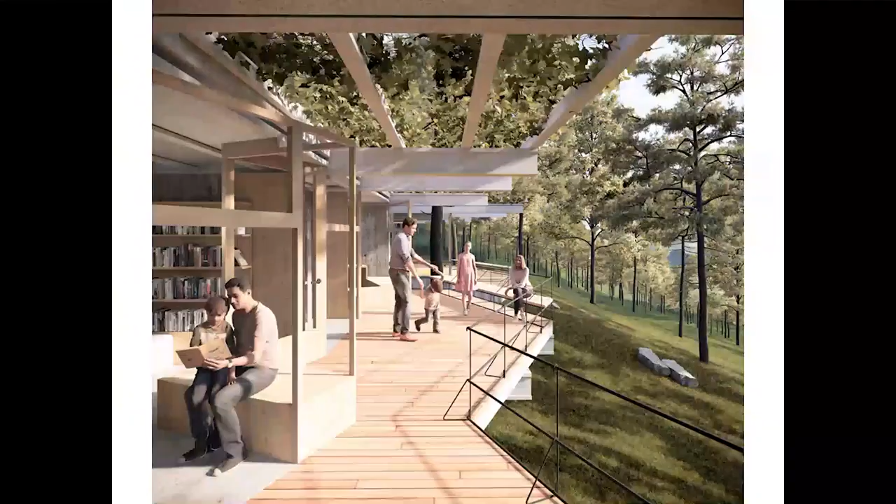Depending on the conditions of the weather, you can live outside or inside, opening this membrane and transitioning from inside to outside very freely, in the summer and in the spring. So you get this kind of outside life all the time, like camping into the slope of the mountains.

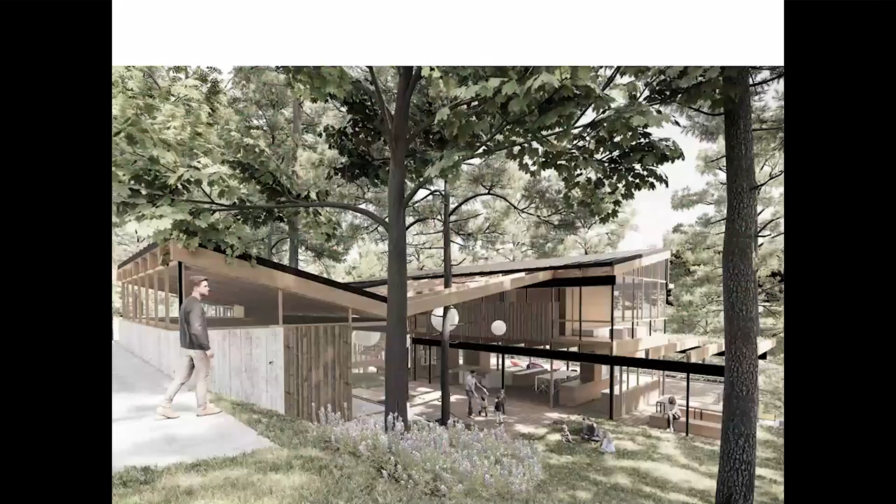The third one was another case that was completely different. This was an experiment about the way families are formed today. This is a couple from Germany who wanted to move to Spain, and they had young children, but also a son and daughter from previous relationships. They had another family, had married, and had children themselves. So they wanted some kind of seasonal living together in the same house.

So they asked for some kind of dual house, a double house, for them. And they wanted this to be in wood because they are used to living in a house in wood in Germany. So they wanted us to explore the possibilities of making this in wood.

This is another site very close to the second site I showed you, but it has views to this World Heritage site, the monastery of El Escorial. From the house you can see this - it's a very important landmark in Spain, a very important monument. And they wanted, of course, to have views even from the bathroom to the monastery.

So we researched and found this reference, a very famous one - we didn't research a lot. That is Alejandro de la Sota and Corrales y Molezún, the children's residence in Miraflores de la Sierra, in the same mountains, more to the east. It's this kind of timber structure that follows the slope, exactly the slope of the mountain.

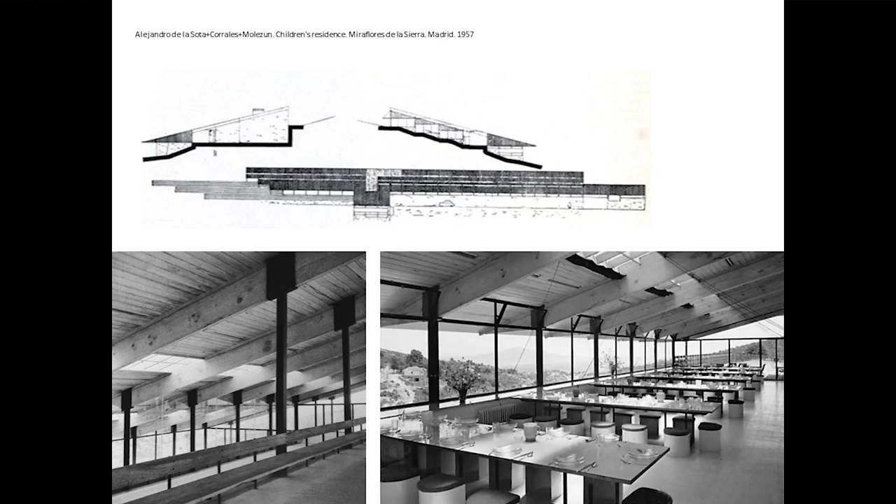You can see in this section that the slope of the terrain and the slope of the building are exactly the same. So from all the spaces you can see through the building, achieving very long views through the building. And also technologically and tectonically, we were very interested in this kind of architecture.

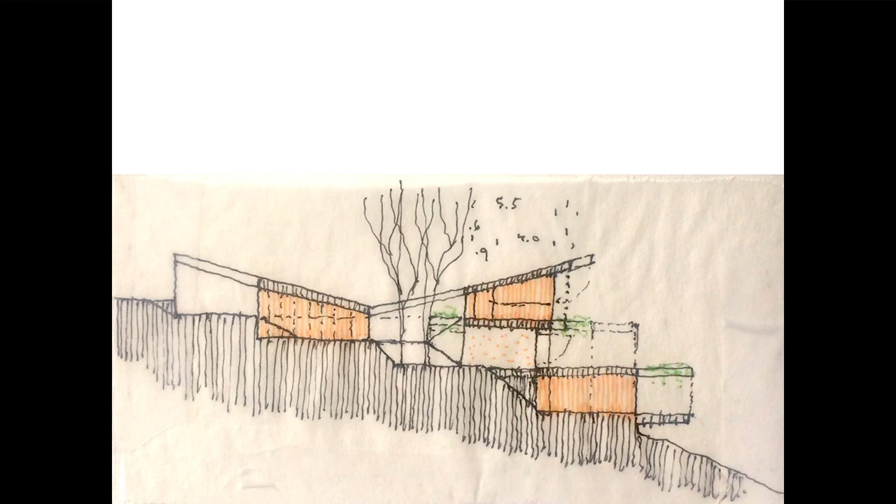So you can see that this is the double house. We had to put the bedrooms in 2 levels. This is the house for the son and the daughter, and this is the house for the couple. They wanted to have also some kind of studio, some kind of workshop, because they publish and work in edition.

But you can see that this intermediate level is completely open, so you can always see from everywhere. You can achieve views of this monastery of El Escorial even from the back of this space. So again, it's a building that goes down by half levels, like stepping down the slope. You can see the section here.

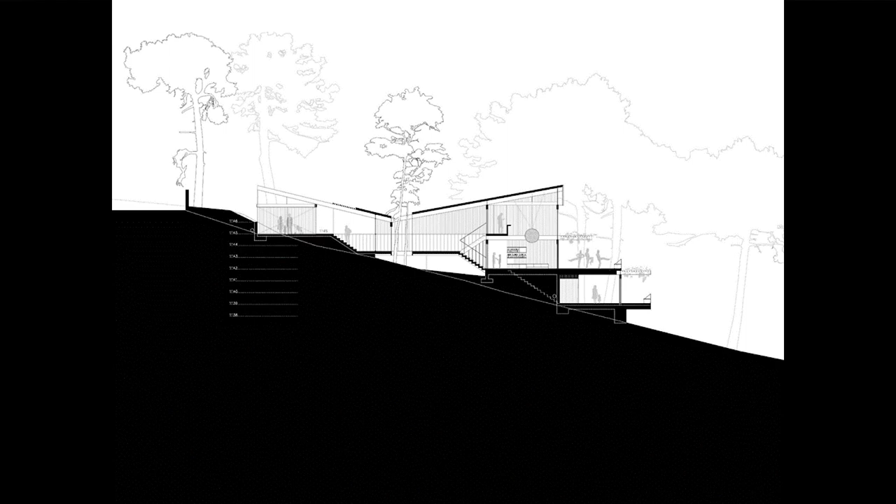So every stair here is half a level of the building until you reach the lower level, which is the house for the daughter and son. Again, you can see that the achievement of this house is the transparency of this space. It's a house made with very small pieces of timber to be able to transport everything to the top of the hill, because it's a little bit remote.

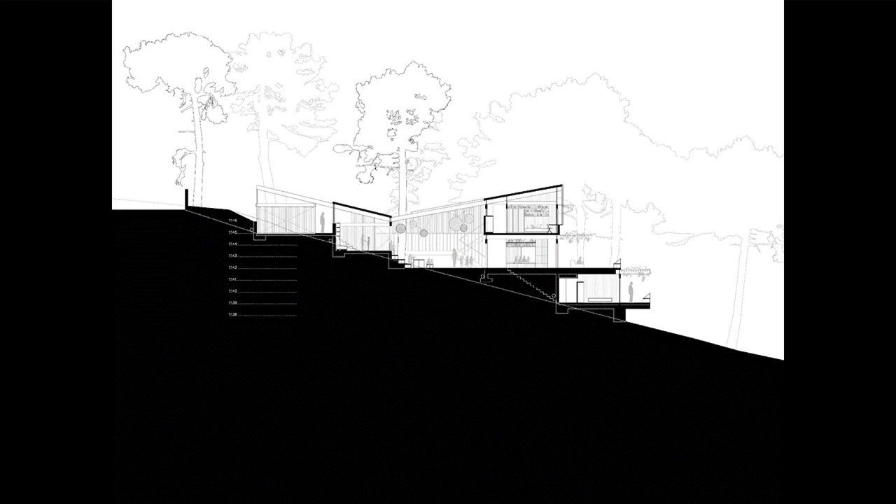It's not far away, but it's very steep, so we needed to have a plan to move all these pieces to the top of the hill. You can see here the transparency and achievement of the views. This is the back of the house, this is like the workshop, and you can see the views from here of the monastery of El Escorial.

One thing that is, I think, important nowadays is the connection between interior and exterior. That is, in Spain it's not so fluid as in the US. In the US, life is more outdoors more often. In Spain, it's more like you are in or you are out - there is a boundary there that is more difficult to trespass.

And I think this is changing, with COVID. We have this sensation that life outdoors is more important than ever, and we have this kind of patio as the center of the house nowadays, this intermediate space where you can have working space on the left, living spaces on the right, and this kind of garden space for the family.

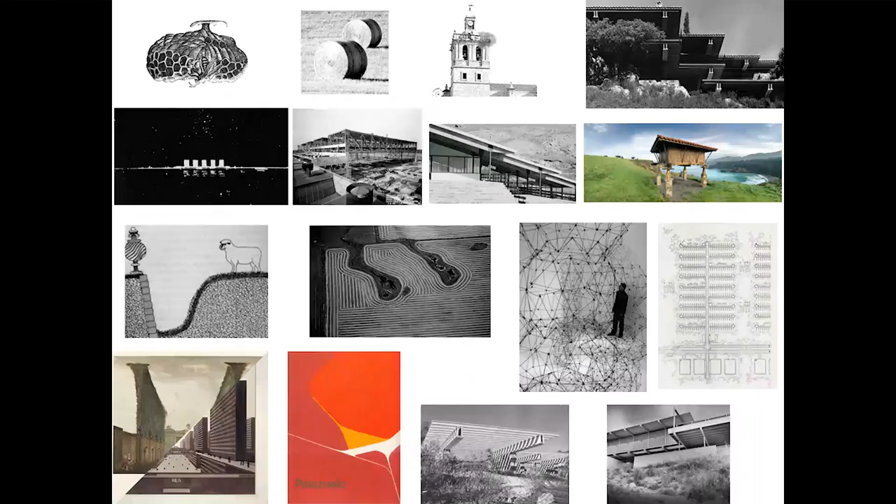So in the same way that Julio Cano was doing his maps, his constellations of references, we can do exactly the same for projects. This is our constellation, our archipelago of references, and this is the way we want to connect with the traditions of Spanish architecture, modern movement, Spanish art sometimes. But it's a way in which I think we can reactivate or reenact these traditions, trying to change the perception that people who see our work can have of these traditions.

And we are going to end with another statement, and that is: this division between the functional requirements of architecture and other requirements. Architecture, of course, is a public service. We need to achieve a number of relevant social, functional, environmental, and technical requirements. This is not required in other arts. But the fulfillment of these requirements is part of the contract we make with society, it's part of the ethical dimension of our discipline, so it's mandatory. But the relevance of a work of architecture, the quality of the work, is not measured by the fulfillment of these requirements.